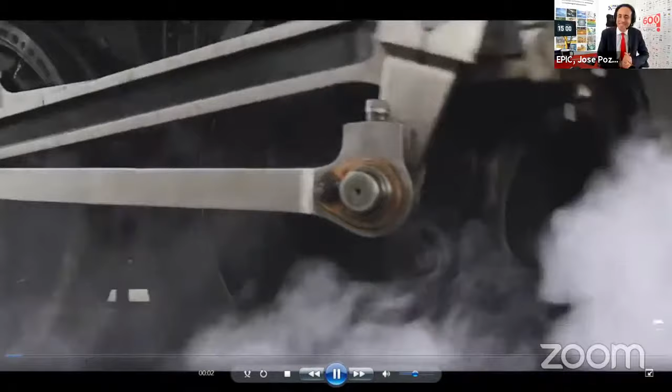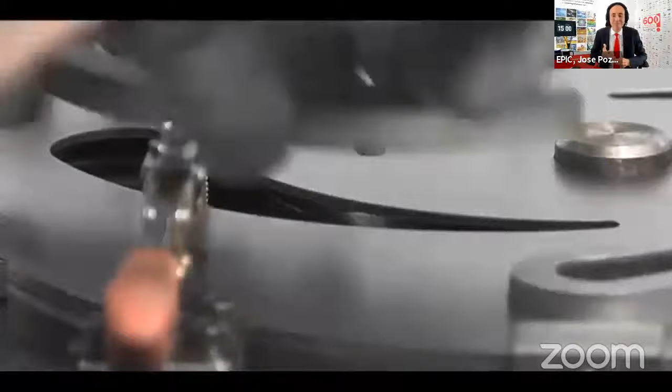Okay, start the engines. Let me take you back to the year 1850, the start of the Industrial Revolution. Most people think it means machines replacing humans, but in fact, it was all about manipulating metal in an automated process. Fast forward to 2001, the telecom bubble explodes, and at the same time, companies developing photonics see a huge opportunity in laser-based manufacturing. 10 years later, 2011, Industry 4.0 was first introduced.

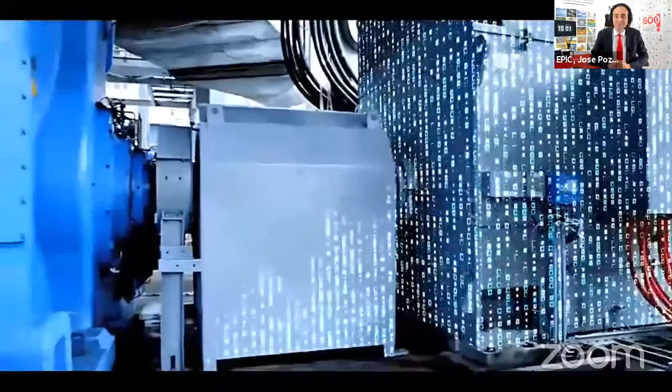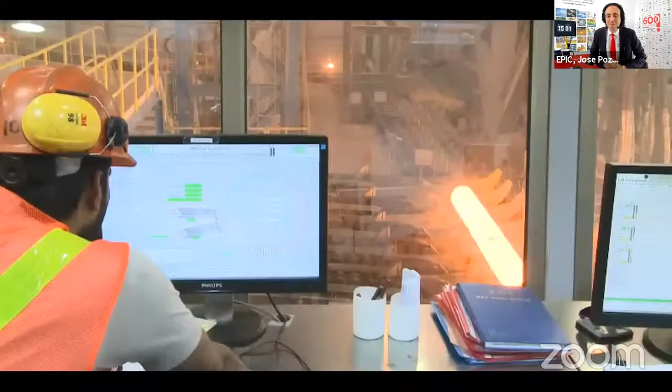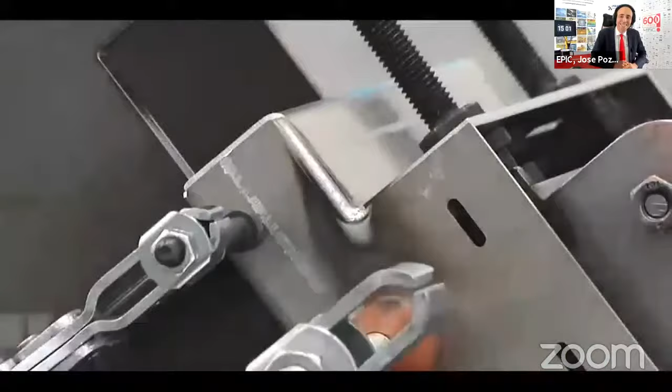Year 2020, Monday, October 19, 3 p.m. Central European Time, we discuss advanced and additive manufacturing of metal. Steel remains the driver of the macro manufacturing world. Processing steel effectively is a secret to success, and photonics is that key to success. With lasers, we can weld, cut, drill, 3D print steel.

With optics, we project the right beam shape. With infrared cameras, we monitor in real time. As a result, we satisfy the precise needs of automotive, avionics, naval, civil engineering, as well as those making medical implants. My VIP guest list includes ArcelorMittal, Airbus, Stryker, GE, Trumpf, Siemens, and BMW.

So plenty to talk about on Monday, October 19th at 3 p.m. in the EPIC Online Technology Meeting on Advanced and Additive Metal Manufacturing. We'll have prominent users and the complete photonics supply chain in our Zoom room. Don't miss this opportunity to ask questions and enlarge your network, because in this business, disruption is the only constant.

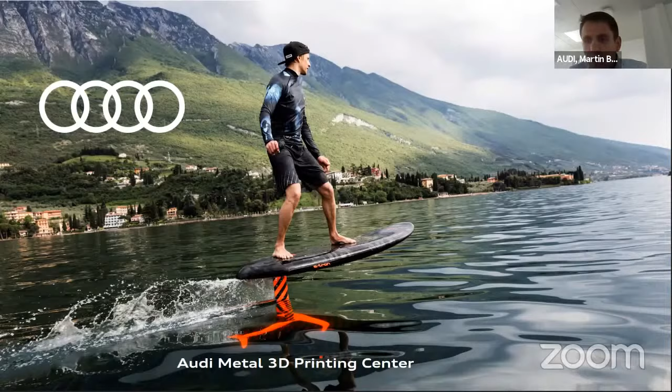So this would be a big wallpaper in the next 5 or 10 years, I think. You can drive with this e-tron e-foil over the sea. This is the Garda Sea. We tested this board on the Garda Sea, and we printed this amazing board within 100 days of development time. So right now it's a prototype status, but it's been publicated via Twitter, so we can talk a little bit about it. So lightweight, aerodynamic, efficient, and of course emotional.

It's a kind of outthinking of the box. Because what did you think? Audi, okay, we are talking about automotive, autos, large ones, small ones, and so on. But this is maybe a little bit fantastic, and also thinking out of the box, why we are here in Ingolstadt based, and we also think about fun, of course, and fun gear. So this e-tron eFoil was developed within 100 days.

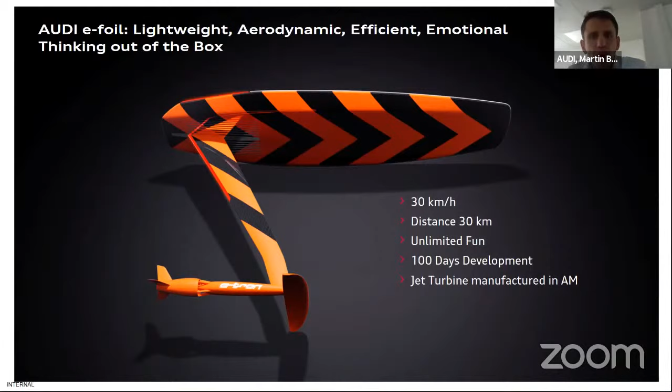Very tight schedule, therefore we need additive manufacturing technologies. The jet turbine is only possible with AM technologies. So I have to search about parts, defining parts that are only able to manufacture in AM, not in die casting, not in joining technologies or so on. That's why AM stands for us also.

So we have a small center, only 3 machines, because we say we want to develop the technology. We want also to see what happens with the machines, with the automated process, and therefore we have a small machine park with outstanding technologies, of course. And yes, it's quite alright for us from a capacity standpoint.

So we understand the materials behavior, the surfaces produced, and if we need more parts, we go outside and produce these with distributors and also developers. So what's important? 4 engineers, 3 applicators, a very small team, really engaged, and we want to industrialize this technology.

Also, we have only 3 materials, so all other materials will be placed on the market elsewhere. If we need a part from titanium or so on, we need suppliers. Because it doesn't make any sense to shift materials on machines every day or every 2 days. It doesn't make any sense.

You have to understand the material behavior in the laser melting process to improve the process. And all machines we have on the shop floor are improved by us. So we developed our own printing parameters for the last 5 years. We enhanced the production capacity of these machines.

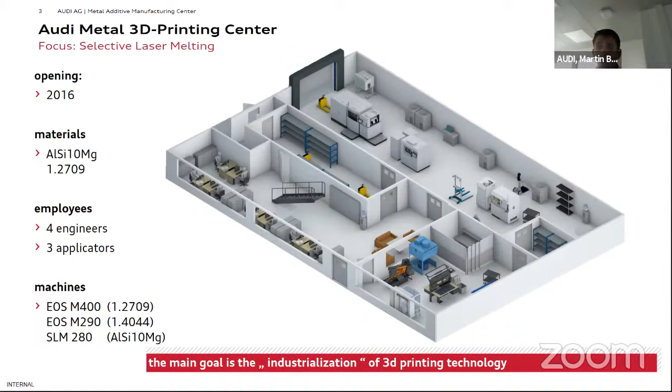But to be honest, we are in a prototype status. Therefore, we need this technology not for manufacturing parts at large scale, 1,000, 2,000 parts or so on, large parts for cars, interior and exterior. No, other machining technologies stand for that. So it's right now prototyping perspective.

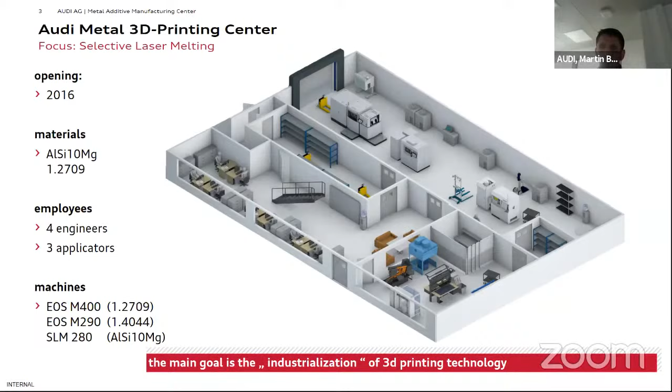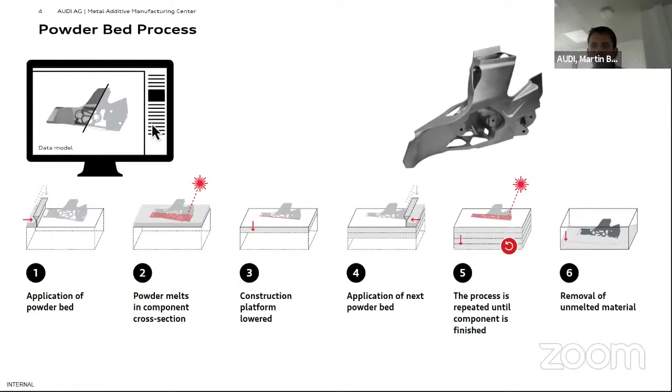The material process, the powder bed process, everybody would know, I think, how it works. Otherwise, you can check this on the internet, and you can also request me after this meeting directly if you have any more information. I don't want to bother you with old or standard information, you know.

But what is important to understand, you have the melting process in the machine on the side, that's the central picture, but you also have to think about the complete process chain. Here you can see a tool insert manufactured in AM with a weight of approximately 55 kilograms, and a manufacturing duration time on the machine of at least 15 days.

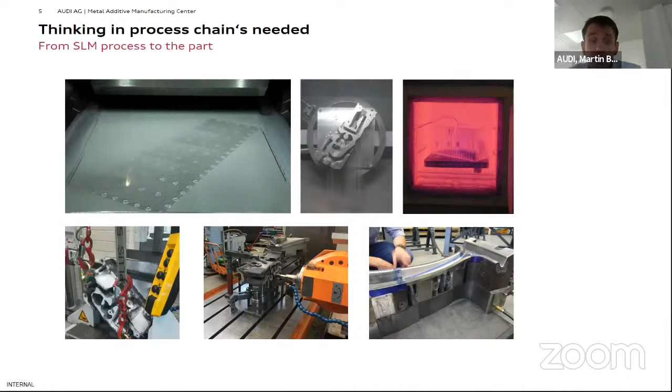And then you have to think about the process of depowdering, the heat treatment process. Material properties are very important, and you can define the material properties you need during the heat treatment process, and also milling, eroding, and then the finishing process. So that's very important, and that's my main message. If you want to invest in this technology, think about the process chain, think about your knowledge along this chain, and then you have to prepare this process chain you have established on the market, or you have to extend it in your company.

But why do we need this? As I imagined and talked about for the future, no tooling is needed, of course, but you have very rough surfaces. If you take a look around here in detail, surfaces are not clean, not glossy enough for interior parts. So these parts will be used only in prototyping status. But we can shrink the delivery time for such parts from 12 weeks to 1 week. That's the main advantage of the process, nothing more.

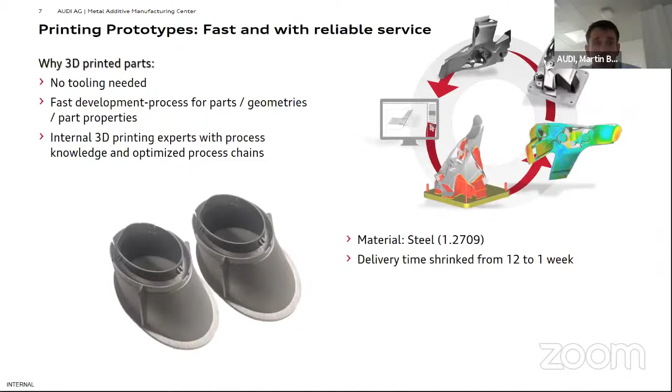So the prospect of the technology - the main drivers from automotive are cost per part, or fast service. If you have any problems in the daily business, sometimes you can solve these problems very fast with AM technologies. Then the cost per part doesn't matter, but you have to see what happens during this process.

Prototypes are quite all right for motorsport, pre-series center, design studies, expositions or show cars, maybe also sometimes spare parts, yes, for the Audi tradition, also for Porsche manufactured parts, spare parts.

And yes, equipment is also a big topic. As I mentioned, we are manufacturing tools for hot forming, tool inserts, not the complete tool, die casting mold inserts, also robot grippers, of course.

But we see a red light or a yellow light so far on serial parts. There were discussions in the last years about lightweight potential, bionic structures, but the problem with these parts is the higher cost per part. So no end customer will pay more for bionic structures or slightly lightweight designed parts. There is no possibility, of course.

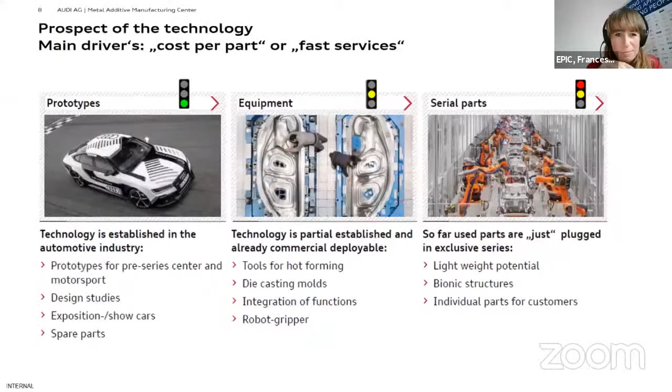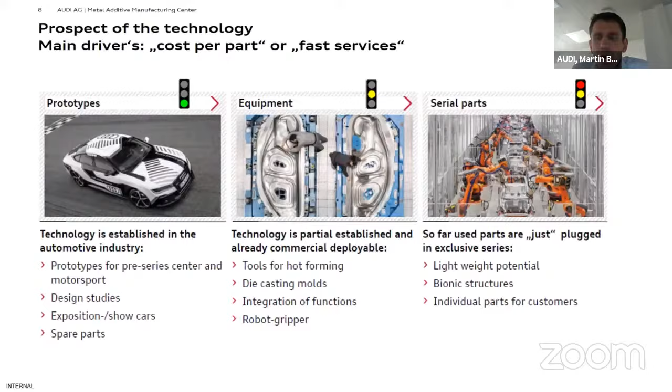And then the other orange-red traffic light, if I remember correctly Martin, is that you have to do a bit of post-processing, right? Yes, of course. Post-processing is the main cost driver. This is the unsolved problem in this community.

There are some solutions. We've done some research on etching technologies ourselves because we are lazy guys. But we need more personnel, more knowledge, more networking with each other to figure out what could happen. It's mainly a task for universities. I don't think it will be done within the next two or three months - it might be solved in one, two, or three years, co-funded by the European Union or something like that. I'm not sure, but yes, Francesca, you're on the right way.

Yeah, okay, you should hear me now? Yes, okay, we do. So okay, thank you for giving the floor. I'm going to share my presentation, put it in presentation mode, and see how I can get my screen shared. There's a green button below, you click on it, and then click this, use the right screen. Say share - just a little bit different. Let me see what happens now. I'm going to presentation mode, and it's the wrong screen as usual. Stop share, I'm going to try a second attempt because this isn't the first time this happened - sorry for the small delay. No problem, it should be. You can also switch once you're already in presentation mode. Yeah, so you will see now at least there is one - it's not coming yet. Not yet, but one moment. Now, once again, either I have to get out of presentation mode, or - oh yeah, I have to bring you to the other screen. Sorry for this. Because I'm a Teams user, which - yeah, we have many of you. Okay, and now it is not - let me see, let me see. It's coming - yes, there you go. Stop. Okay, thank you, well.

Thank you all for attending the presentation. Today I prepared a few slides to guide you through additive manufacturing as a machine vendor, and give you a bit of history of our company, what we offer - that's very compressed - and then some examples and a number of questions or challenges we face as a machine manufacturer and designer.

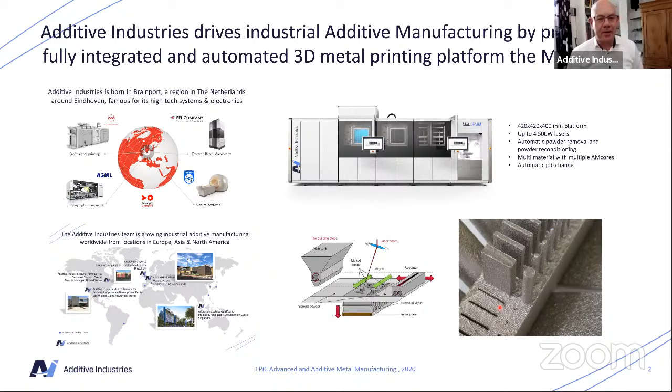So the machine in itself is automated in the largest phase, but our customers are allowed to start small with just a simple system and add automation, and then have full integration with automated job stores, job storage, heat treatments, powder removal, part removal, and so on. So this for the machine in itself.

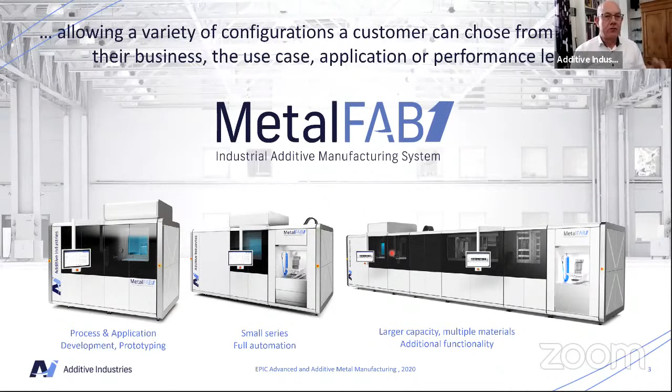And now going back to the application. What kind of questions do we get from our customers? All our customers have different questions in a way that sometimes they embrace this new technology for the design freedom or the customization which you have, for example in the medical field, like at a hip cup here, which you can make patient specific. Or you go to performance drivers like temperature regulation.

This is a crosscut of an electrical motor housing, and it gives you an increase in performance. We have customers who love the fast design iterations possible with this technology, like in Formula One, but also in certain areas in oil and gas and energy field.

Like here in hydraulic blocks on the right, once again fast design iteration, but also on-demand manufacturing, especially in the spare parts business, in industries which have to maintain systems for a long time. They want to print on demand. They don't want to have all the parts on stock because that is expensive, but also because of obsolescence risks.

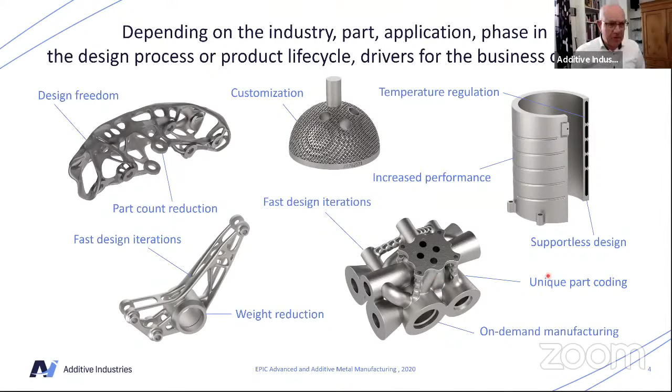Some other examples here about the performance of such a part. This is a part printed out of titanium, it's actually a wheel suspension. It has fully integrated hydraulics. It also connects this electrical motor housing I showed you as one part. It has integrated hydraulics, you see a small hydraulic channel that's fed through that housing.

This was an assembly of multiple parts now printed out of titanium, lightweight, for in this case a university racing competition in electrical vehicles. But this is a concept, it's also made by generative design. You can see it by the special, let's say, more nature-like forms. So it's lightweight, full performance, function integration, and so on.

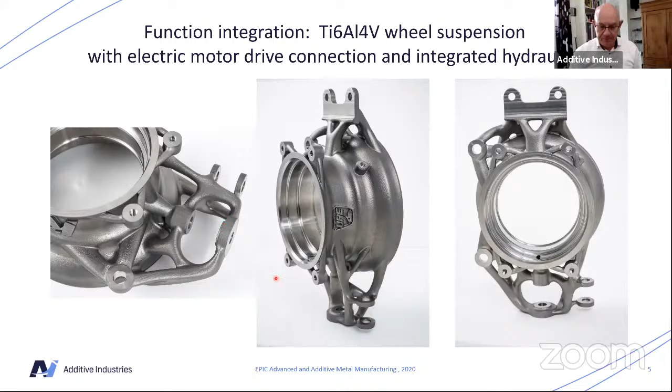Another nice example which we recently shared was we developed, in a Dutch project, a wafer stage which is used in a wafer, let's say a chip machine from ASML in our region. The goal of this stage is to make it as fast as possible, because you need to bring and do that at sub-nanometer technology. And by having, we could say, generative design, which also incorporates the constraints of additive manufacturing, we were able to...

Print these parts just as one piece, no support structure. You only had to cut them off. And then finally they were milled because we needed to put some parts in, some blocks. The part itself is then floating on a magnetic stage, which very accurately positions that part, which is a silicon wafer, on which are the patterns projected to make the microchips.

So here it was actually the design algorithm that allowed us to give the part a better performance. By incorporating the constraints of AM, we could print it as one piece. And finally, the performance of the part was substantially improved, so we could run 20% faster with positioning compared to the existing designs, driving costs down in microchip production.

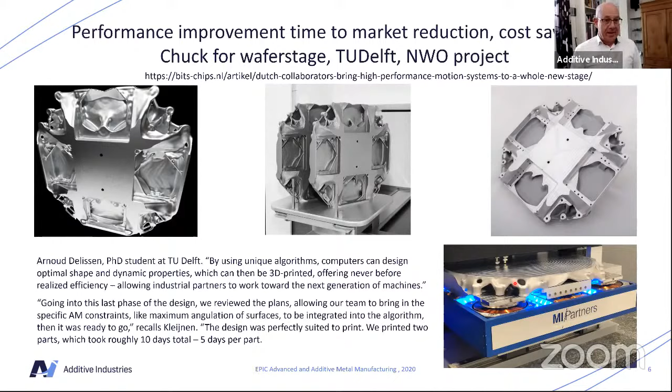And finally, it's more what drives now our business case and actually also our end user, and that's something I would like to come on. So the optics in an AM machine are the most expensive point. Lasers are expensive. The optics, the beam shaping, the mirrors, the galvanometer mirrors, any optic window, they are really driving the costs. Typical components already mentioned are the laser, but also the protective windows where we have the IR protection in front of the build chamber, when you look into that glass, into that build chamber.

So in our system, we use a principle we call dynamic focusing that allows you to project with the lasers on the full field. But you can imagine if you do this in a fast way, these are, well, let's say high-tech concepts, very strong dynamics in mechanical, in electronic controls, and so on.

And if we are able, as industry, to drive the cost of these parts down, that will absolutely allow our customers to find more positive business cases in their industry. So in that way, we are all connected.

And the typical challenges in the way for us are focus stability, power stability out of the lasers, position stability over the long term, that the laser is always projected on the same area of the build plate, but also long-term stability in the laser-to-laser calibration. Because on the right here you can see this is the conceptual design of our system where we have 4 lasers connected to each other, and actually they should run as one laser.

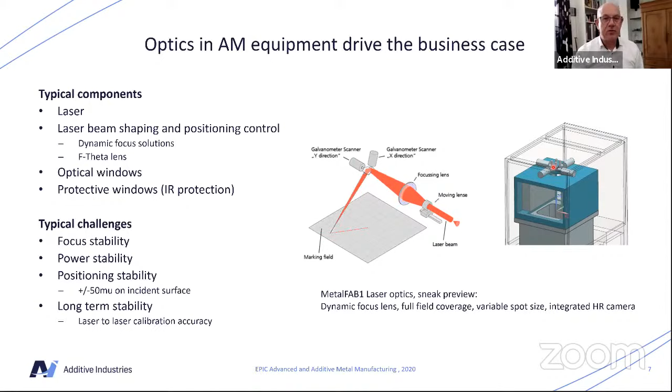And that's actually where I would like to stop, so to end my presentation with. So if there are any questions, please let me know.

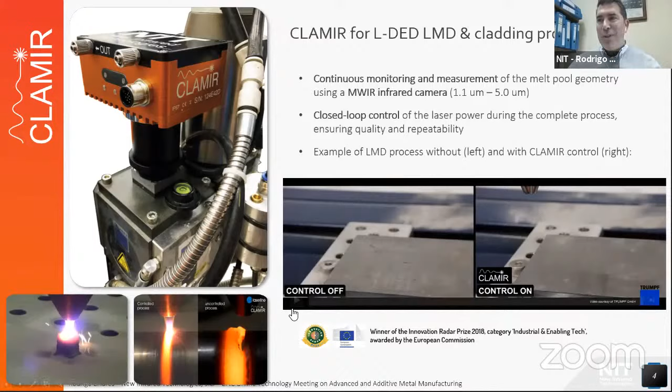This is a system we have built for direct energy deposition processes such as laser metal deposition and cladding. I think related to the talk before from AUDI, with the automotive industry, this system offers closed loop control of the laser power to ensure quality and repeatability, for example for repairing molds when building parts, or for applications like cladding material on car brakes. The system is closed loop, and an image is worth a thousand words, so I'm going to show you a video of what the system is capable of doing. On the left side you can see a process without control, an additive manufacturing process made without control.

And on the right, you can see the process controlled with CLAMIR. In this case, during the process, the system has prevented the accumulation of heat, and this has improved the quality of the part that has been manufactured. This video was acquired by our friends at Trumpf, so we thank them very much.

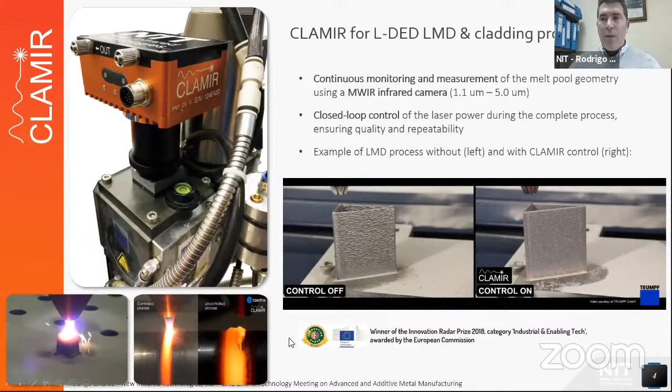But this is an LMD case, and on the left side we can also see an example in cladding, another video taken by Laserline. One of the advantages of this system is that it's fully compatible with optics from Trumpf, Precitec, and Laserline, which makes possible the retrofit of some systems.

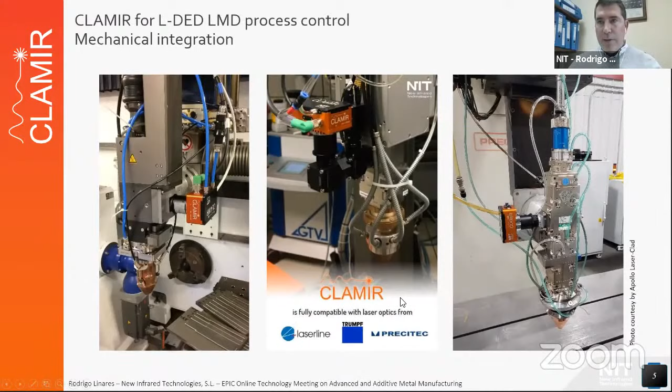We are part of an EU project called Custodian, where one of the partners is building a closed loop control of the PBF process using our camera. So this is the kind of system we can offer, for example, for this application at Additive Industries.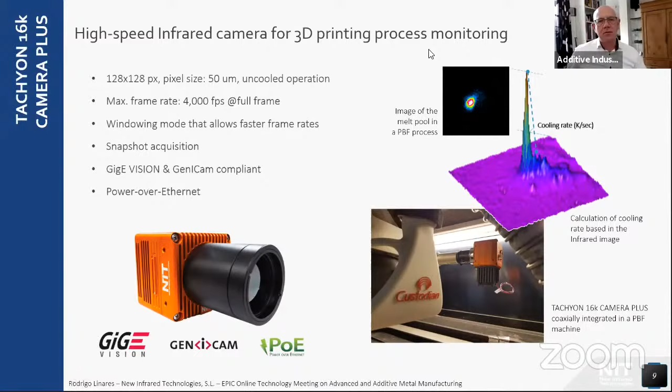There's obviously lots of room for cooperation here, lots of room for discussion. Harry, there's something else I want you to discuss, and there's a company in Epic from Lithuania called DMC.

Sarunas, how are you doing? He's smiling, I really love this guy. Sarunas, thank you very much for joining today.

I think there is clear partnership here between additive industries and DMC. What do you think? I have you muted. Yes, yeah, hey, nice to see you.

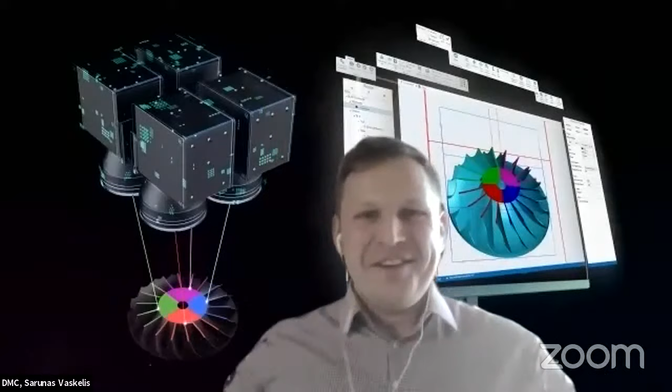So yes, we are making the software, and the software handles all the process from CAD import, then process preparation, then handling all the machine control up to the final part. We do some advanced things like multiple galvo control, from 2 up to 8 or even more, and some even closed loop systems and so on. I don't know what your thoughts are, so maybe we could discuss this after the meeting, but we might be able to have something.

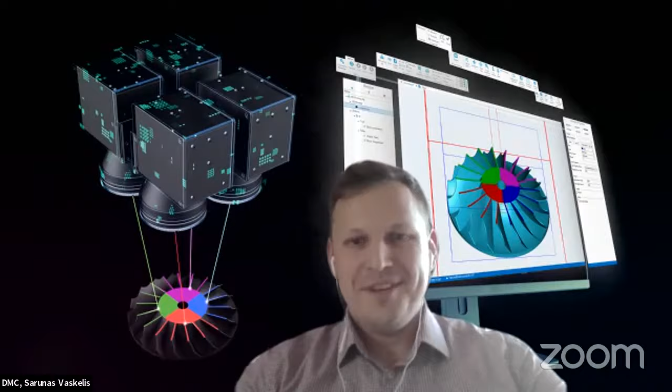Additive industry has taken software as perhaps the golden fruit, the most important part of a 3D printing system. Harry, do you have still some challenges when it comes to control automation software?

The holy grail would be having a closed loop control of the laser power, the beam of the laser, actually the melting pool. The LPBF process is a heat induction process, and we know that depending on your part geometry, depending on the kind of process settings, you need to actively control your heat induction. Today we do that with a fixed set of parameters, which have limited adjustability in a way. But if we would have the opportunity to really look in that melting pool and control the temperature of that melting pool actively in the dynamics of 10 to 20 kilohertz, which is what happens in that pool, then we would have the holy grail of getting a stable process and predictable material quality.

Sharing the holy grail is something great that we got at this meeting. Thank you so much, thank you Harry for this, it was great to have you here. The first of many, promise me. Computer vision, I want you there.

We have Infinite, Benjamin raising the hand. Benjamin, what's on your mind? Hello, yeah, I was thinking about Rodrigo Linares.

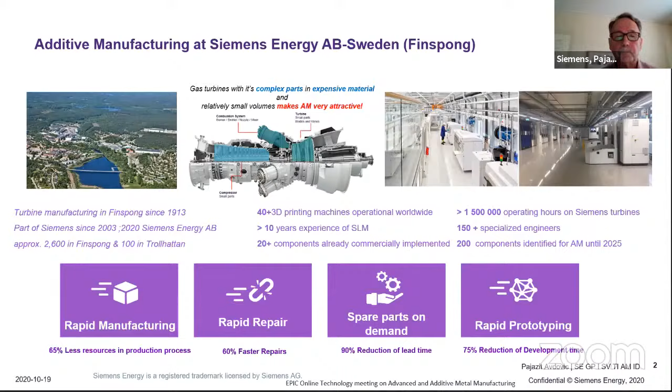Our history started in 2006, when we bought one company from England, Material Solutions. But here in Finspång, Sweden, we started 2009 with our first M270 SLM machine, and it was only for testing. So the biggest expansion of additive manufacturing started 2012 to 2014, where we bought more machines from EOS, the M280, 90, and 400 Quattro.

Around 2013, it was the first serial production, the repair of our burner for our biggest SGT 800 turbines. After that, our history began, and we started, for example, the Centrum of Competence, and began qualification of different materials.

Our material is nickel-based, actually, so we haven't any titanium, aluminum, or similar. So 2016, we had the inauguration of our workshop, and after that we started to develop production of components like blades and burners and similar. So 2019, we started a new workshop, which is now also in production.

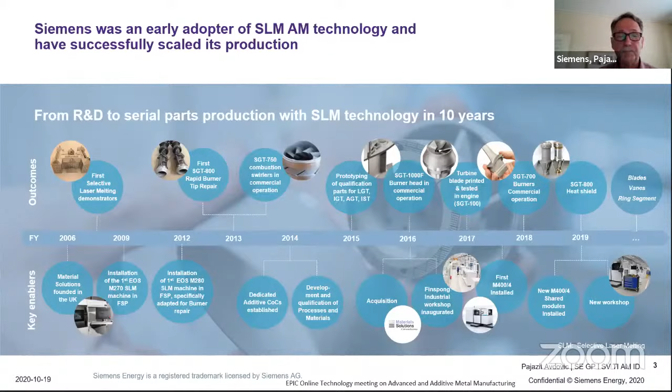Going back to 2015, 2016, in our traditional workshop, exactly in this time we met a lot of problems in additive manufacturing. Our knowledge about material was very low. We hadn't really a design culture in our designers. Software was not really good. We hadn't education. Machine performance was not really good in this time. Also, the quality was not at the right level, and the environment was not really good for our people.

So if you look at the development curve, we were at the top in 2015, and in 2016 we were at the bottom of the development. In this time, we started thinking, what should we do as standard?

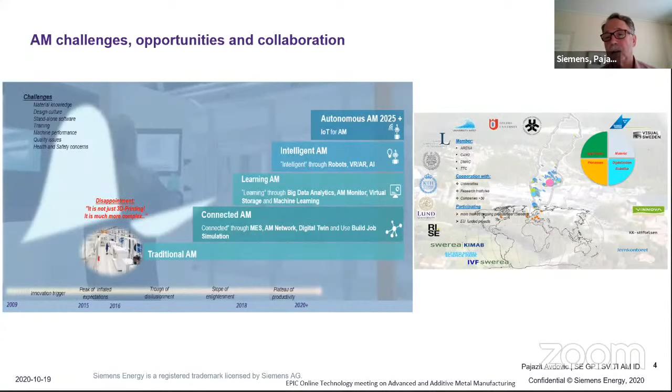So we tend to go from a traditional workshop to one connected additive manufacturing workshop by using a manufacturing execution system, AM networking, digital twin, and more software. Today we can say that we are between 60 and 70% finished. After that we start learning the AM workshop by using big data analyzing, AM monitoring, virtual storage, and machine learning. The next stage is an intelligent AM workshop using robots, virtual reality, augmented reality, and the last stage is an autonomous workshop. The plan is 2025 in Sweden.

This result of our development is really connected to our cooperation with universities, research institutes, and companies in the same area of additive manufacturing in Sweden and worldwide. So today we are a member of a lot of different forums like Arena, Canto, DMRC, and similar, and we have about 20 ongoing projects per year related only to additive manufacturing. We are a member of Manuela, a European funded project, focused on automatization of pilot lines for additive manufacturing.

So we are working in 4 different areas: application, material, process, and digitalization, and robotic.

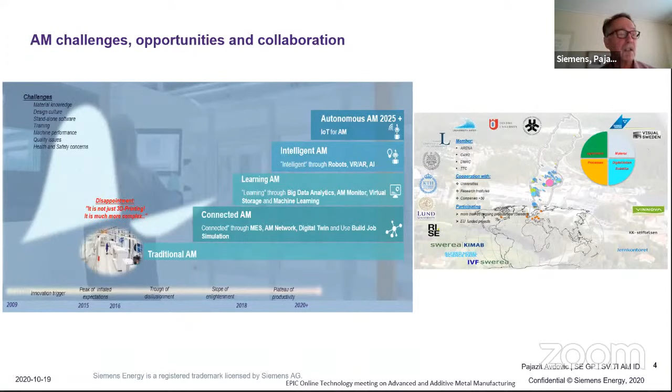For this conference, I want to show some examples of our benefits. The first one is our burner. This is a typical component for gas turbines, including 13 different components and 18 different welding positions. You can imagine how difficult it is to put together 13 components using 18 different welding positions. Today, this component, using the fantasy of our designers, was made into only one component, and we changed the lead time from 26 weeks to 3 weeks.

So the next area is nuclear power. We made one component, an impeller, for a nuclear plant in Krško, Slovenia. This component has been in use, I think, for 2 years, and all inspections say that the component meets all the demands it needs to.

The second component is a clapper and clapper holder, for another nuclear plant in Europe. This project we calculate will be finished during the next month.

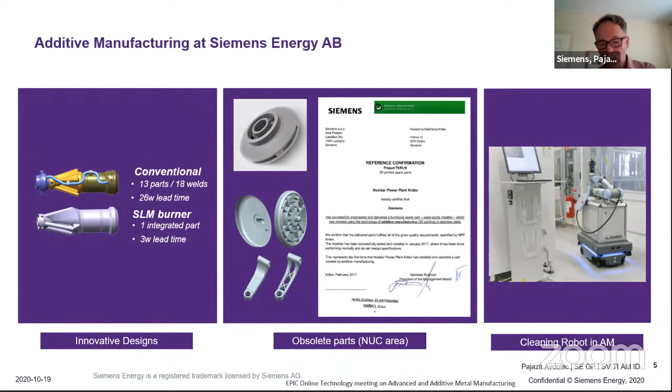Now it's time to look a bit to the future and answer the epic question: what can you do for them and what can they do for you? Because we saw how you developed, you had issues with materials that you overcame a few years ago. Now you put a bit of ideas there, but imagine you're here with all the value chain - that is not imagination, but the truth. What would you like to have from them, for example in the near future, or something that you see is challenging now?

Siemens is the first producer of components for its own production. As you can see, we had the same program specifically for, for example, nuclear area, which is really interesting for us. There is a lot of policy for how the components should reach all standards with delivering. So this is really interesting for Siemens. It needs a lot of testing, it needs a lot of time for producing, so everything must be on time and regarding the specific standards. So that is interesting for us.

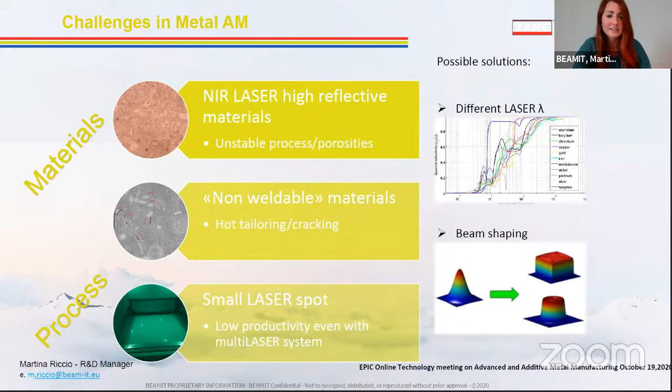What we offer is that we select among our machine park one machine to be completely dedicated to R&D projects with very low TRL. This means we select one of these machines that we want to transform into a kind of Frankenstein machine, putting in different lasers, optics, hardware, printing systems, and everything, just for testing them.

We do this kind of R&D activity in a way that is customer driven, because we know the customer and market requirements, and this is why we think we are able to conduct R&D activities that can, in the future, be very easy to scale for production.

So now we are looking — I'm very happy to be here with this audience — because we are looking for partners for this kind of R&D activities. We are looking to join consortiums for participating in grant calls, and we are looking for other ideas or solutions to develop and test together. So that's all from my side.

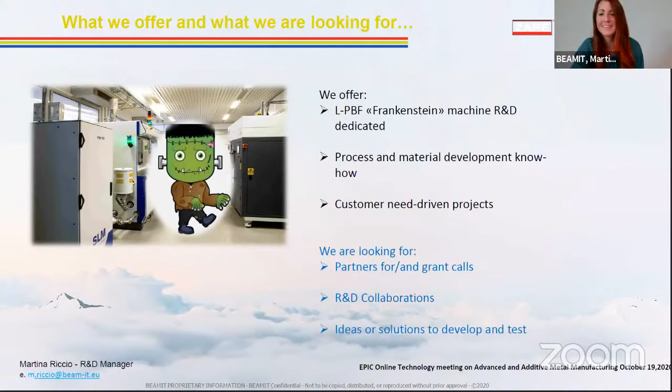Indeed, BEAMIT is one of the success stories of Europe. If you're looking to join a consortium, I'd recommend joining the biggest in the world. This could make it a lot easier to make connections with companies. There is a lot of room for cooperation. Thank you for sharing the challenges you're looking for and what you can provide.

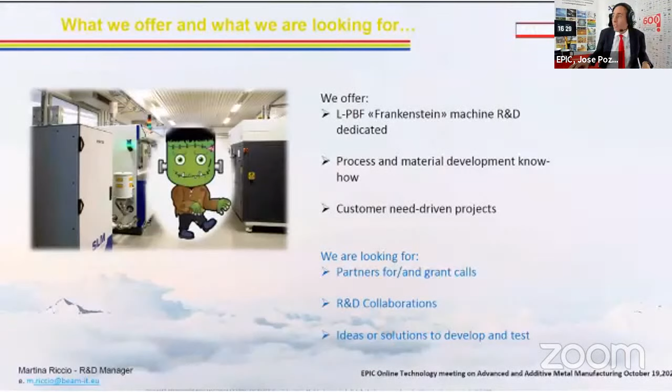I really love that slide, and I'd like to remind everyone that this is what this meeting is about - sharing your challenges. And here it is what they really told us they want to do: a Frankenstein machine. When it comes to this Frankenstein machine, there are a couple of companies which I think can help you.

In a previous meeting, we had a presentation from Aconity 3D. And Aconity 3D had a very interesting process in which they could actually use two different materials in the same 3D printing process. Yves, are you with us?

I think I took a risk. Now I am, and I'm not. Can you hear me? Yes, loud and clear.

Yes, I know this issue with Frankenstein machines. We also have customers who have those because they find an old laser in their basement or something, and they say, okay, let's put in that laser, Aconity, you're a special machine manufacturer, can you make it happen? And that's what we call Frankenstein machines - different parts and bits and bytes within one machine.

But yeah, Jose, you're right. We have developed this multi-material part which can be integrated into one of our systems, and that has been developed by a project partner of ours called Aerosint, and they can most likely help you if you want any multi-material options for your machines as well. However, that is more based on powder bed fusion, so not a typical beam approach, I would argue.

But anyhow, solutions are out there. So if you want any help implementing any Frankenstein parts, just reach out to me later on, and I'll be more than happy to start a conversation with you. Let's see if we find any solutions for the problem you have here currently.

Anyway, it's about heat treatment. Heat treatment with our lasers is an old history, and even heat treatment with lasers is a quite old history in the laser world. But in the heat treatment or hardening technology world, we are still newbies, even though we've offered heat treatment for more than 20 years. Anyway, we can do the heat treatment not only on solid parts, meaning standard manufactured parts, but also on additively manufactured parts. There's no difference in principle. The problem could be that the materials where we do the hardening are hardenable materials, and additive manufacturing of that kind of material might be a bit of a problem because of the risk of cracking and the high carbon content. But if you do the additive manufacturing at elevated temperatures so you can manage it crack-free, then we can of course do a local heat treatment for softening or even for hardening afterwards.

Anyway, if I speak about hardening, it is a heating process as a first step, to a certain level of temperature depending on the material. Then we have a quenching. The quenching happens by heat flow into the cold part of the whole part. So we make just the surface heating and then heat flows rapidly into the complete volume of the part, and this is the most effective quenching you can have. It's better than any liquid quenching with its Leidenfrost phenomena and anything else. That's why we can even do hardening on low level carbon steels, maybe 0.15% carbon, and still get the max hardness possible even with this low carbon content.

So that's very specific for laser. And the other very specific thing for laser heat treatment is that we can apply the laser very locally. That means we do the heat treatment just where it's necessary, and the overall heat input is down to the minimum. So at the end, the resulting distortion is down to the minimum.

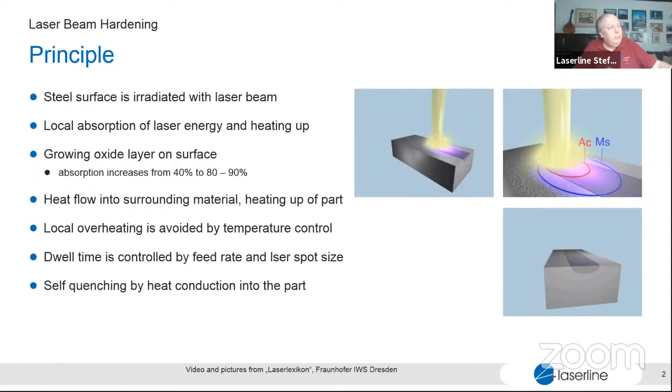On the other hand, the absorption of the laser depends on the material and the surface condition of the material. If you have a very shiny steel part, you have 40% absorption. If you allow oxidation, you have 80%. That makes a difference. If you do a post-treatment by milling or grinding, you can usually allow oxidation and have a very high efficient process with 80% absorption. Even the temperature measuring is highly efficient because any pyrometer or camera-based system can measure with an emission coefficient of 0.8 or 0.9 with high accuracy at these high temperatures.

So this heat treatment is a process that can be applied locally, highly efficient, and with low distortion at the end. It always runs, as we heard this topic today, as a closed loop process. We always measure surface temperatures with pyrometers or camera-based systems, and we give the signal to the laser power to keep the surface temperature constant by controlling the laser power in a closed loop.

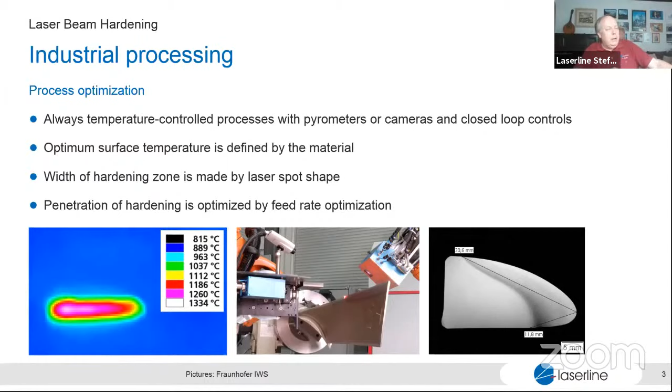What we need for doing laser hardening for most parts is a very well adapted shape of the beam. We don't necessarily have a round spot for laser hardening. Sometimes we need a rectangular spot, but in most cases we need some flexible adapted spot in size and intensity profile, depending a little on the process.

Sometimes we have processes, as you see in the center, where a rectangular spot is sufficient. We apply two rectangular spots to harden a tooth of a tooth rail—shot by shot, tooth by tooth, two simultaneous applied spots, shot by shot. The customer has different sizes of his rails, so we need just a rectangular spot that can change in size.

That's what we have. But sometimes we need an intensity profile that changes from left to right, and that's what we don't have so far. We have some systems from Fraunhofer where we can do that with a scanner, but they're limited to 6 or 10 kilowatts. Maybe in the future we'll apply our 20 or 40 kilowatt lasers even for such processes—that's what we would need: beam shaping systems, flexible spot shaping systems for elevated power. That's a lack we have so far.

Let me speak backwards a little about the principles of laser beam hardening. The classical process is feed hardening: a certain spot moving over the part, or the part moving under the spot. The second, already mentioned, is single shot hardening—a spot applied to the part, on, off, done. The third version is rotating a part very fast, applying a spot, generating a hot ring by this fast rotation of the part. With this hot ring we make local hardening of a ring, or even local hardening of a cylindrical shape. These are the three main principles of laser beam hardening processing.

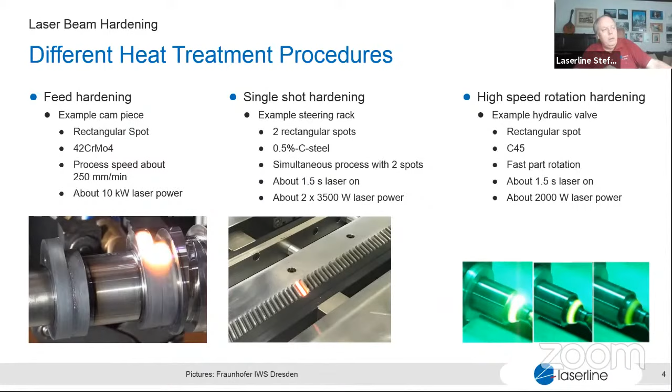Here you see some examples from hydraulics, automotive industry, or even machine industry. I already mentioned the advantages: less distortion, no quenching liquids, high productivity, because we can integrate that nicely into production lines. But we also have some disadvantages—we're limited to a penetration of 1.5 millimeters. This is due to self-quenching: if we let the heat flow deeper, we don't have the conditions for self-quenching at the surface of the part. So those are the limits.

Sometimes we need to change the material if you want to replace an existing technology. For instance, case hardening requires a low carbon material, where you put the carbon into the part during the process. But with a laser, we need the carbon already in the material in advance. So we need to replace or change the material, and that's sometimes a problem in manufacturing.

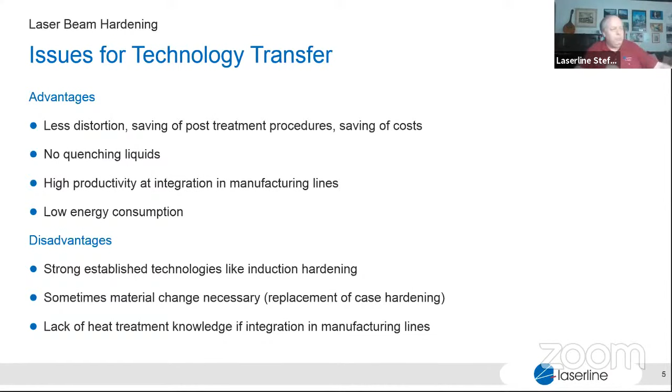On the other hand, despite doing laser beam hardening for over 20 years, there is still a lack of knowledge about this kind of technology in the heads of manufacturing designers and manufacturing guys, because they all think in standard production chains—soft machining, hardening, hard machining—and they don't think about integration into the line. But this is an option we have with the laser, of course.

Let me come to the 'what we need and what we have' slide—this is my last slide. We have some solutions for specific geometries of the laser spot for laser hardening. We have some optical solutions: rectangular spots are done, that's what we have. Zoom for rectangular spots is done. Ring-shaped spots or round spots exist. But we don't have 2D intensity profile changing, size changing spots for powers over 20 kilowatts or over 10 kilowatts with a scanner or whatever flexible elements. That's what we would need.

And we would in general need some optical elements for very high powers, up to 50 kilowatt. Most of our systems run at 10 or 20 kilowatt, but maybe for the future, to treat larger areas, we would need optics and optical coatings that can withstand these very high powers and high intensities.

And the accuracy we need for the machining, for the laser processing, is achieved by standard CNC machines or even simple robots. So the accuracy is sufficient.

Post-processing is another topic that would be nice to have, depending a little on the manufacturing. For single part processing it would be nice to have. For mass production it's not necessary, because you program once and then the machine does the job day by day, 24/7, with no problem.

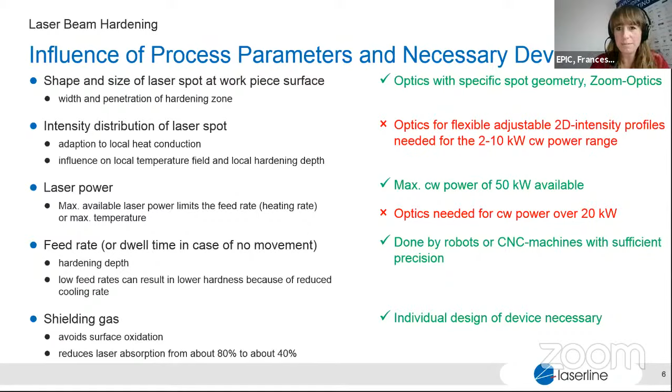So let's unshare your screen so I can do it as well. There you go. So now it's finally a nice opportunity to discuss together how we can help Laserline, especially for the optics. Is there someone here who wants to comment on this? Because I see you're a bit shy.

Maybe we can help Steffen to design these specific optics. Of course we need to set up some more requirements, but yeah, I guess we can do something. Yeah, I can make the connection to our developers.

Maybe Frank, can you make a couple of comments about what NTS Optel is doing, so we can contextualize the offer a bit? Yeah, sure. NTS develops—it's a first-tier company that develops basically all kinds of optics and mechatronic systems for end users and OEMs. Very good. So then we can also connect you later on, and that's the best thing we can do for you. Yeah, then sure. Are there other questions or comments about optics?

We have here some experts also about the lasers. I have a question for Steffen. Yes, sure. Okay Steffen, is it also possible to do some surface treatment? One of the characteristics of the AM process, powder bed laser fusion, is that we have micro cracks on the surface, specifically affecting fatigue properties. Usually in fatigue-prone applications you need to do hipping or shot peening or something else. But would laser treatment be an option to improve part characteristics in this respect?

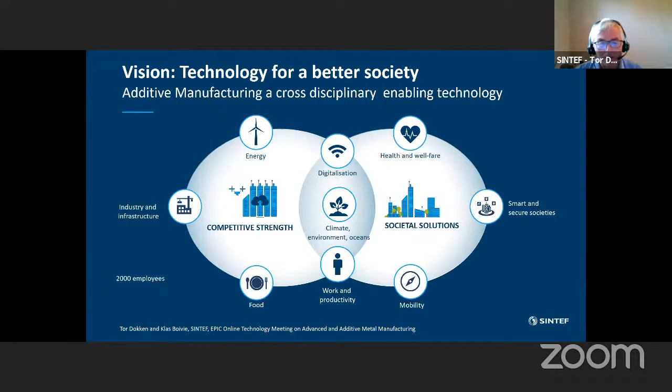So there are many aspects of additive manufacturing that we address from different perspectives. Then where do we find additive manufacturing in SINTEF? We have different institutes with different names; the names have been modernized. SINTEF Community, there you find AM in construction. In SINTEF Industry, that is composed a lot from chemistry and materials research, you have AM and materials, and also catalyst design.

Then where I come from, SINTEF Digital, it's AM and digitalization, the mathematics, we need all of that. Then you have Ocean - okay, we got 40% of the continental shelf in Europe, so there's a lot of activity there, and they use AM for different purposes. Then SINTEF Energy Research, as you know, we got a lot of oil and gas activities, and there's a lot of use of AM in that area.

And then you got SINTEF Manufacturing, that is more focusing on the additive manufacturing process planning. During the last years, we have had a lot of cooperation between SINTEF Industry, Digital, and Manufacturing with respect to additive manufacturing, somehow looking at this from different perspectives of the different research fields.

Then AM and digitalization in SINTEF. So I come out of more the mathematics side. How do you represent geometry? If we look at traditional CAD boundary representation, you just represent the surface. Additive manufacturing also needs the representation of the inside. Then we talk about V-rep, real mathematical volumetric representation, that we also have done a lot of input on during the last years to STEP ISO 10303. Then also looking at new ways of representing voids in a structure, and also better connection of geometry and simulation.

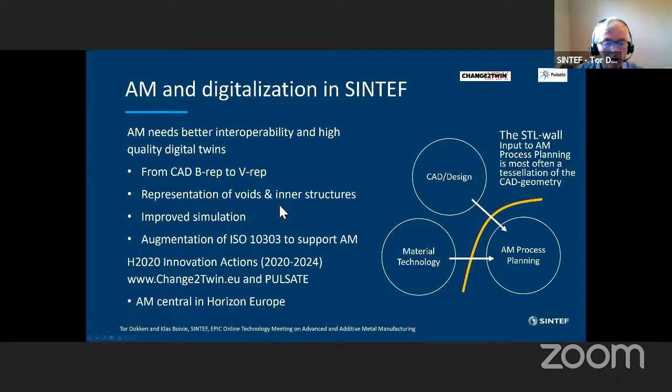Okay, thank you very much, Tor. Thank you very much, Tor, and I have complete trust that among your many skills and extreme expertise includes that you are a most brilliant slide changer.

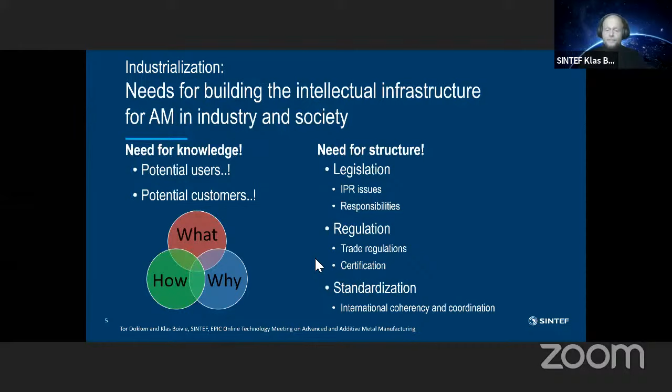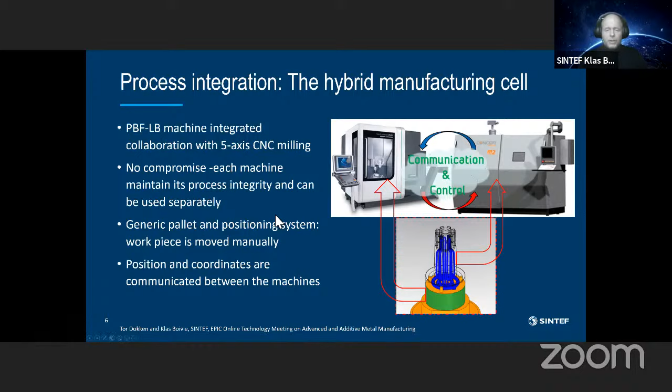Looking at the whole thing, we need to keep the entire process chain in mind, as has been mentioned by many companies here. To do this, we need a specification of the AM-enabled process chain. The need for this is that the industry wants first-time-right production and reproducibility. When you start your build, you would like to know that the part that comes out will fulfill the requirements.

There are several technological keys to this. We first need to specify the process, with specification of every item in the process parameters, all the variables. We need a clear specification of the material, both in the final part and the feedstock, the requirements and acceptable variability in the feedstock to be able to reach the material quality in the final part.

Then you need to put together the optimized process route, and it's not always the same for all the different parts. We need AM and a complementary process based on whatever geometry, the final application, and the specific requirements for each sub-process in the process chain, to actually talk about input and output.

This needs to be complemented by in-process monitoring, possibly integrated non-destructive testing, and documentation of all the key properties to verify compliance with the specific requirements. We need this control at every step of the process chain so that when you have the part out, you can check that everything is right. You can go back, as Tor said, and deal with the difficulty of knowing what's actually happened, but we need to do that in the physical world too. That will be completed with data monitoring and evaluation by statistical process control.

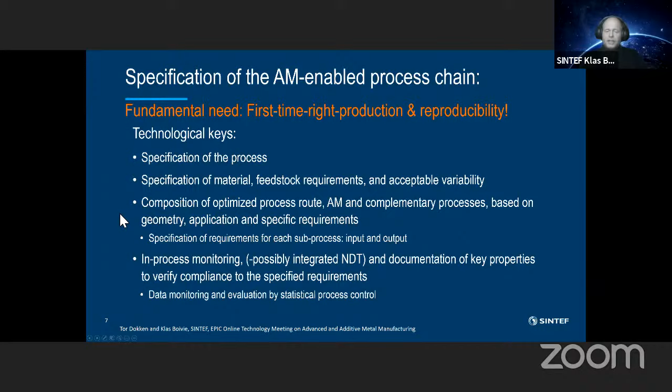Next slide, I think this is the last one. So there is a great vision we had at SINTEF when we talked about this a couple of years ago, and particularly the energy sector was quite interesting. We talk about digital production, integration with additive manufacturing. We look at the pilot solution for digitalization in manufacturing.

So we talk about having a digital product warehouse and feedstock material data with variability. We have those, for example, for spare parts, but also real parts and products, and also repair. We make sure there is an integrated manufacturing solution, AM-enabled processing, different types of AM machines in combination with other machines, working seamlessly, following the model of the hybrid cell that can produce parts.

But during this manufacturing process, we have online monitoring. We have the parameter settings, we have the results, the NDT results. Then from the parts that are out in the field, we can get feedback into the system and compare them to the results we had from the manufacturing chain, and eventually feed that back to see: is this well adjusted with the feedstock? Is it well adjusted with the parts, the design modifications, to have this all in an integrated solution?

This is the vision we'd like to work towards. And of course, SINTEF, being a research institute, as Tor said, we live by having funded projects, and I think SINTEF is very interested in collaborating with anybody.

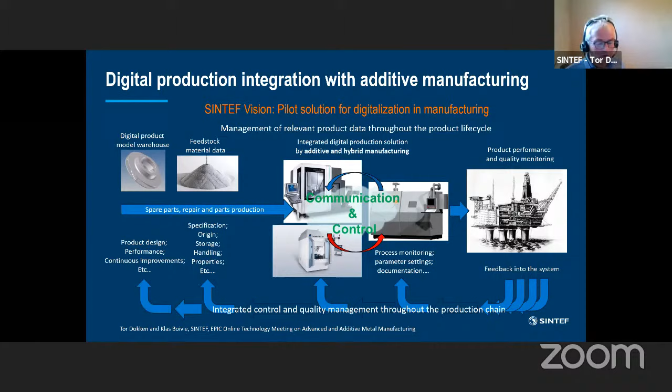Tor here. The company that is really pushing this replacement spare part is Equinor, the big oil company. They are in the process of putting up the first digital warehouse. Some of the new oil and gas fields will not have physical spare parts, but a lot of the parts will just be digital. So there is a very big push on this to save money, to replace very expensive spare part warehouses with digital warehouses and on-demand production.

Any company who has... so yes, please, Klas. Yeah, I just want to say Equinor is great because they're the user. They can create a pull for this. But we need companies that are willing to work with us for the push too. So there will be a push-pull situation here.

And of course, I see within this Epic network, there are several companies who would be very well situated to participate in this. So let's see this as an open invitation to think about how we can make more and better projects in Europe on this with Horizon Europe coming up.

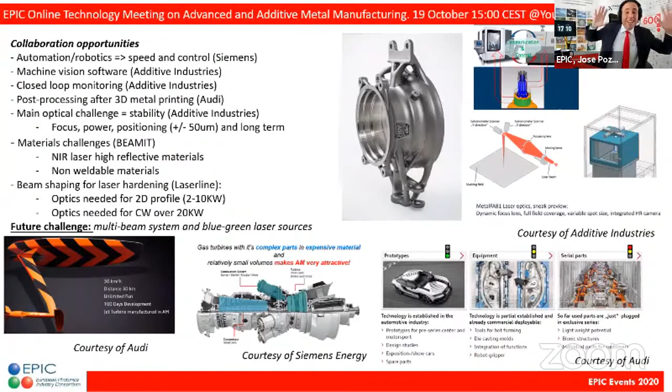They are talking about needing optics for beam shaping, both in the 2D profile as well as the CW over 20 kilowatt laser. The future challenge, reading between the lines of all of you, is a multi-beam system with blue-green laser sources. It's going to be a fantastic road ahead to build towards that particular challenge.

I just would like to say that this is making my dream come true. I really want to continue doing these amazing meetings. I really want to continue working with all of you.